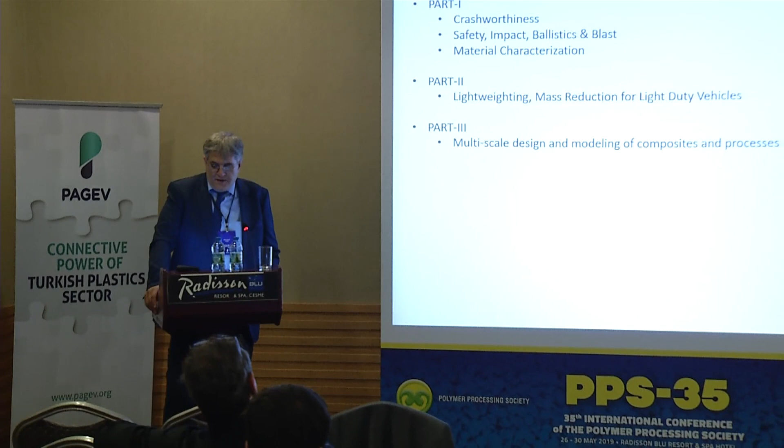My presentation is in 3 parts. It's a little bit long, around 160 slides, so I will go very fast. Don't worry, this presentation is full of movies, so we will be able to see a lot of different applications, including, as you can see here, the crashworthiness of a new car.

This test and simulation has been performed as joint research with the National Crash Analysis Center in the US, and this program is supported also by the US government, Department of Transportation, where we are actually performing New Car Assessment Program testing, which you must be familiar with if you have a car.

If you ever bought a car, you should be aware of their safety ratings out of 5 stars, right? All the cars are evaluated according to this protocol and testing, and their performance is graded against a 5-star rating. This is called the New Car Assessment Program. So as you can see, in this program we are crashing cars with a given velocity and seeing their performances, and their evaluation is also being performed, including the dummies inside.

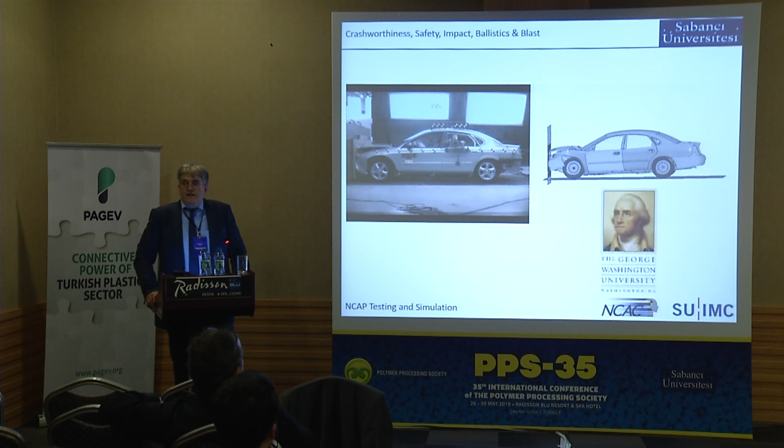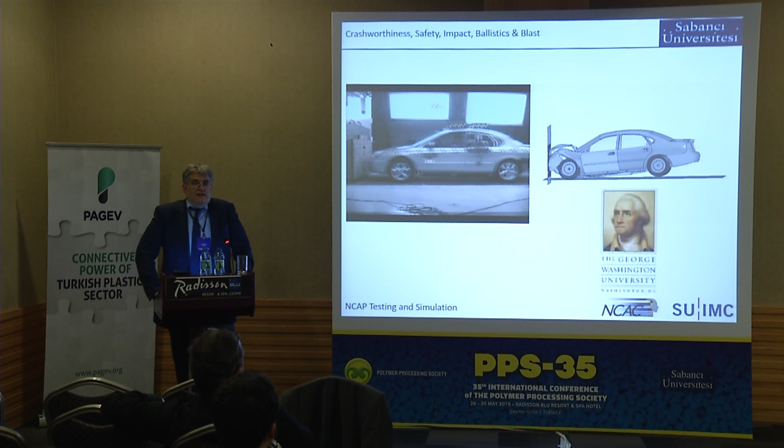This is what we call validation: you validate your numerical model on the right against a real test result on the left. So this is the ultimate goal for any computational mechanics approach, where when you have a validation, you don't need to perform these very expensive tests again and can conduct your research about safety and materials and design later on with a validated model.

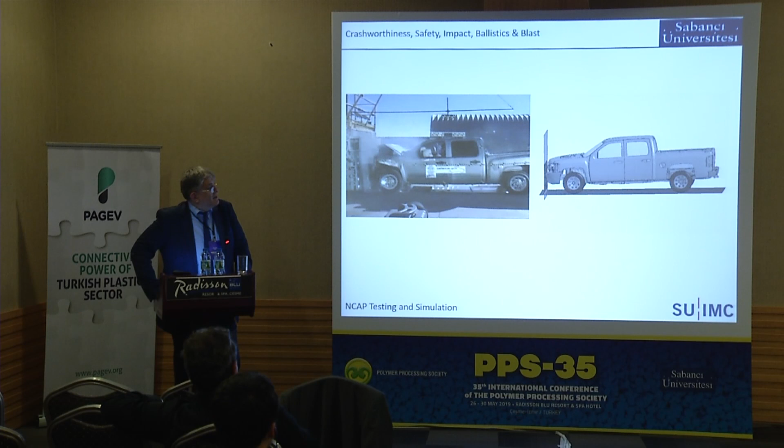Since you have validated here, this presentation will lead, in the second or third phase, to how to actually transform this structure into a composite one. Here you can see very different forms of vehicles have also been tested under this protocol, and their evaluation is graded again according to the NCAP ratings.

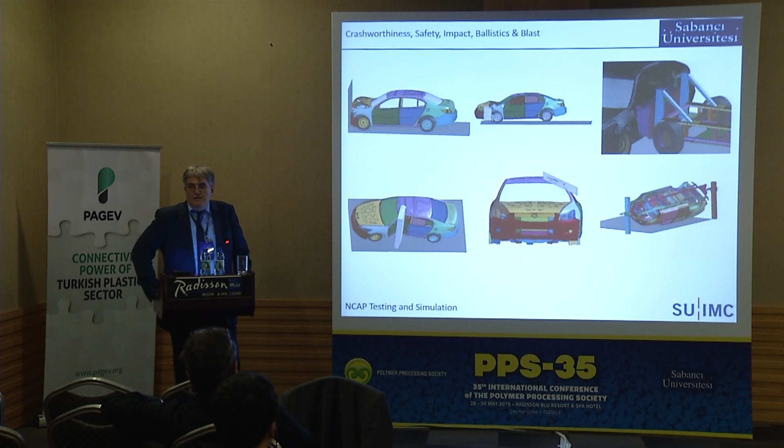You can see these are really very good validations, and these numerical models are very well validated and quite efficient in obtaining the results about safety issues. And you can also appreciate that these vehicles are built with many components, including composites and plastics. The level of validation is quite good, so we can achieve a very good correlation with the test results.

And this level of validation is only achieved by following certain methodologies where each and every component of the car is explicitly modeled. Here you can see graduate students; their job is to reverse engineer the components of the vehicle, test the materials, characterize the materials, and then build this numerical model for validation. This is not an easy task.

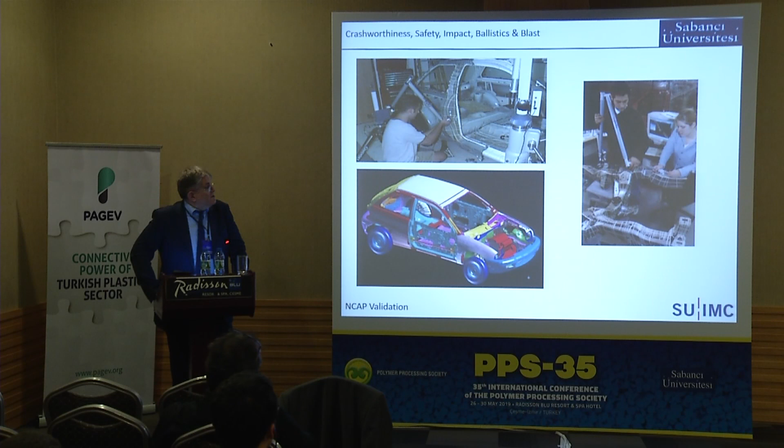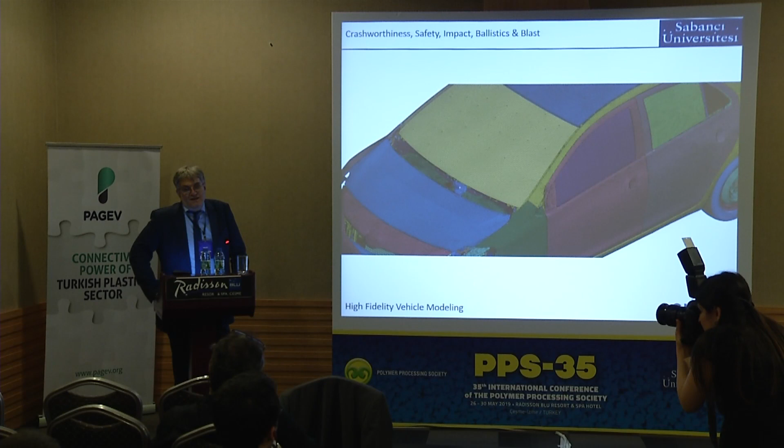This is not trivial. This vehicle model is a numerical model, obviously made up of finite elements, which Eralp Hoca mentioned. But the number of finite elements here is around 10 million, so the model is around 60 million degrees of freedom. This is a very fine model. Each and every component is individually and explicitly modeled, including foams, metals, composites, plastics, glass, anything you can think of in a vehicle.

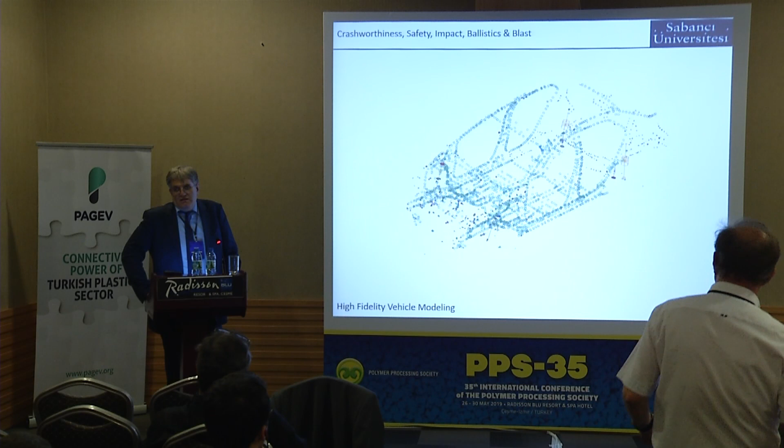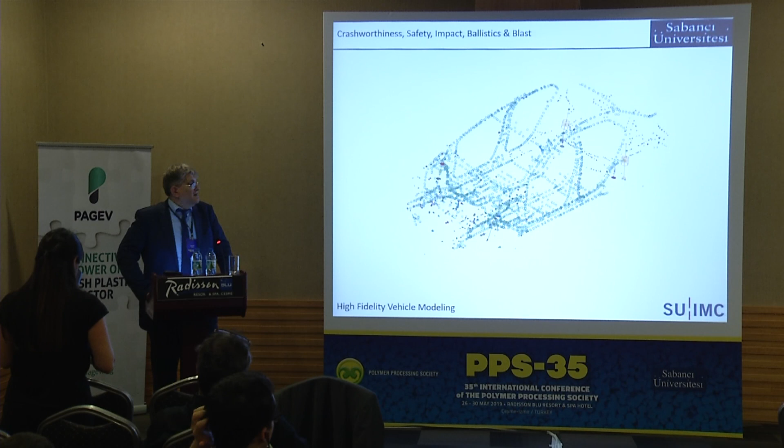Even each and every bolt, nut, and spot weld is modeled, all of them, because you cannot achieve a level of satisfaction and validation without that kind of fineness and detail. Otherwise, this is not possible. You should characterize the material, the behavior of the material, all of them, and then you can expect some level of correlation or validation.

Here in this institute, we have actually modeled a lot of vehicles and validated all of them. And these are also available in public research domains for international research purposes.

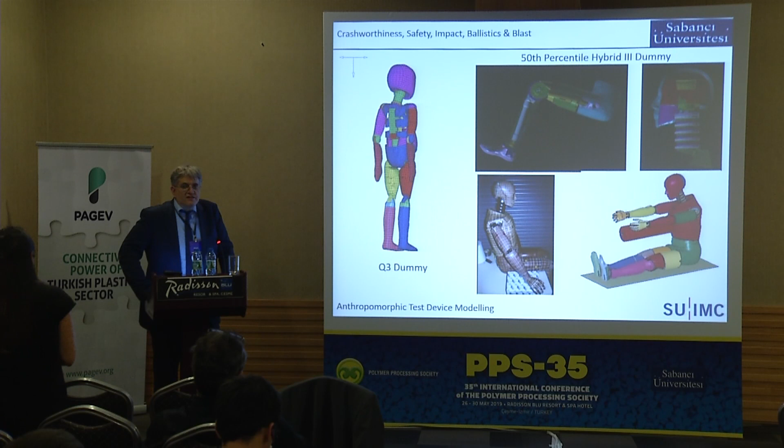Vehicles are not the only thing we have to think about when we think about crashworthiness or safety research. We have to include dummies, where we actually measure the metrics for injury. These are anthropomorphic test devices that are calibrated according to human endurance limits, and therefore we can measure how much acceleration or force is being transferred into the occupants, with which we can justify our injury levels accordingly. There is a family of those, obviously, so you have to characterize a lot of things.

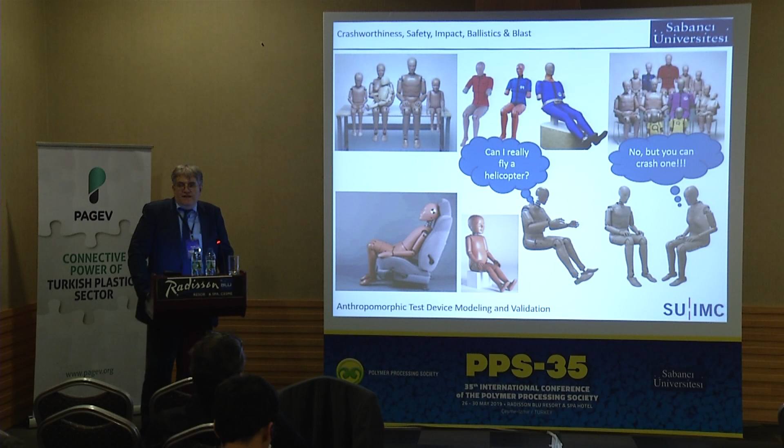Safety research is expensive. Crashworthiness is expensive research, as I mentioned. Any design should begin with crash and end with crash. Therefore, here you can see a lot of composite and plastic parts. Even elastomers are of concern. So the level of accuracy comes from the level of characterization. You have to characterize all the materials included here.

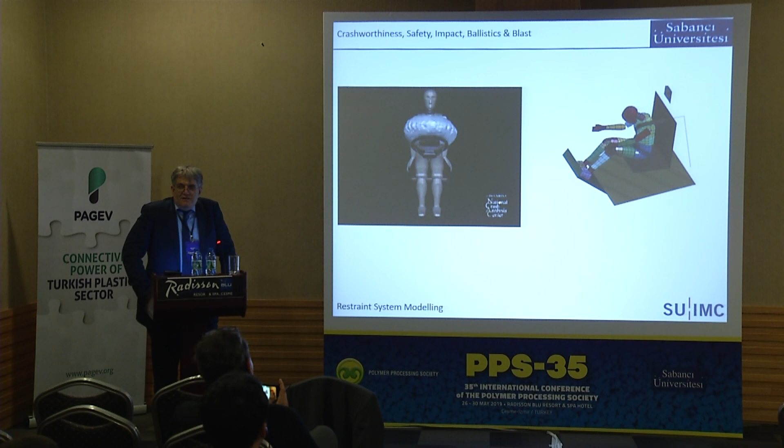In safety research, restraint systems are also of concern, and composites again come into play. Airbags are composite, seat belts are composite, retractors are composite. We have to include that material information and characterization. Foams are composite. When we have a child seat, we have the foam, which is the only thing for a child to survive.

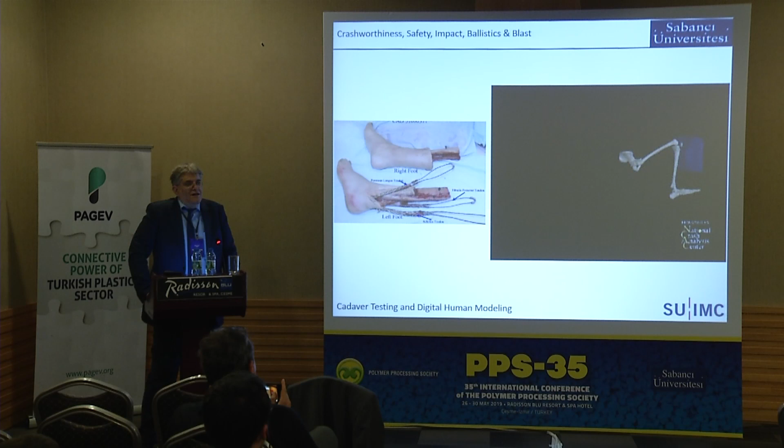Sometimes these materials are not enough, because a dummy is made up of aluminum and rubber, but our material is human tissue; the human is a composite. Then we have to characterize human tissue. We have to perform cadaver tests. We have to model a human. Therefore, the active research in this area is now aging, for example. What happens to human tissue and endurance limits for injury when we age? We have to test. And this is something very difficult.

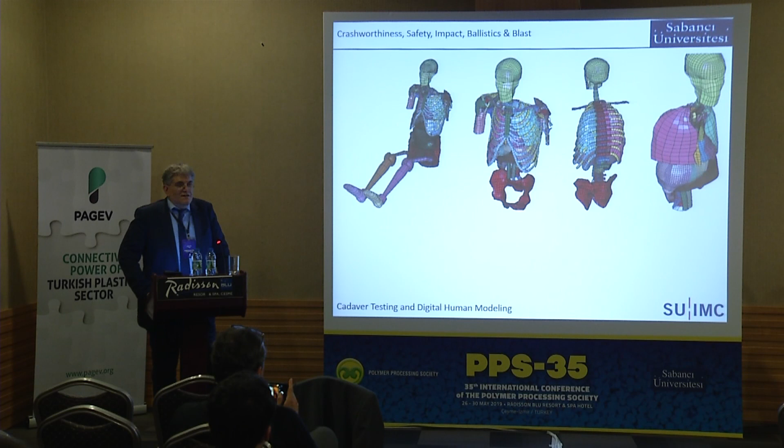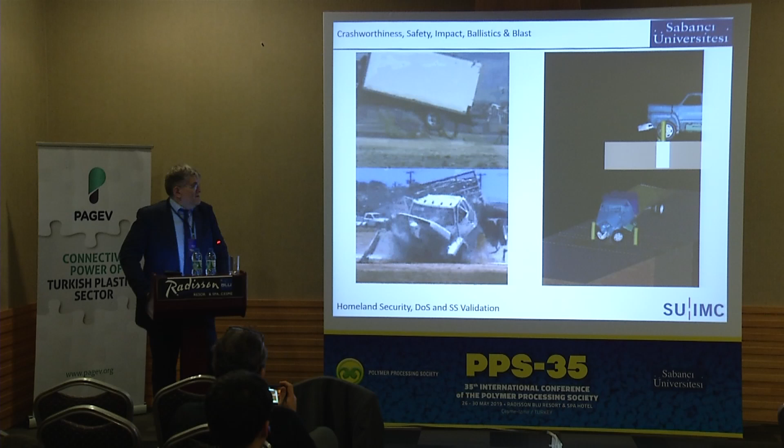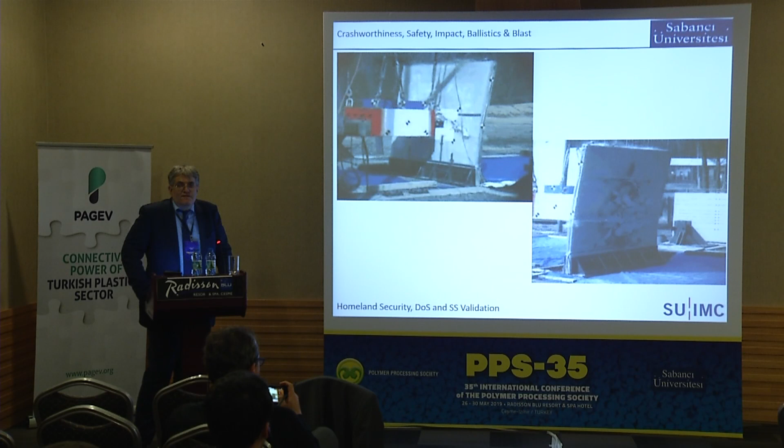This research, when we think about safety, crashworthiness, and the composite world, also involves the characterization and testing of concrete or geomaterials. This is probably the oldest composite as we know it. Concrete, or research related to those kinds of materials, is also in our area of research. Here you can see protection barriers for protecting critical or strategic buildings behind, and the level of accuracy again depends on how much calibration or characterization you have performed on this material, and in this case this is reinforced concrete.

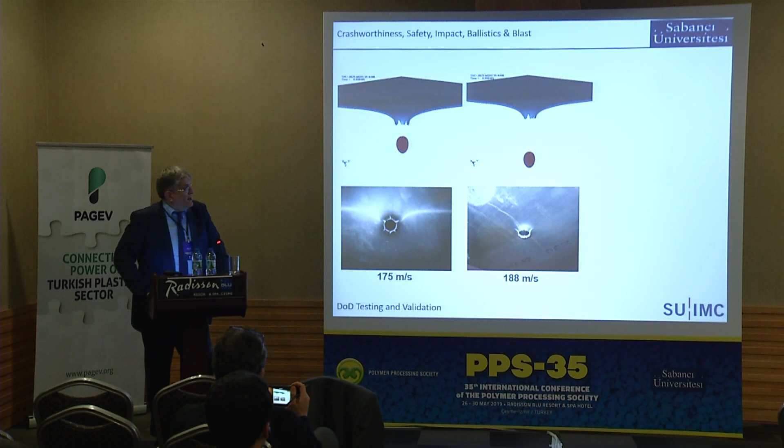Composite research is also very important when we think about high deformation rates. Here you can see a study on ballistics, and we can see that the speed of deformation based on the impact of the projectile is quite high. And we can see that there are different forms of failure, and that is not constant, not certain; it's changing, it's evolving, it's transforming. Therefore, you have to characterize the behavior of the composite material based on the fact that high deformation rates, really high strain rates,

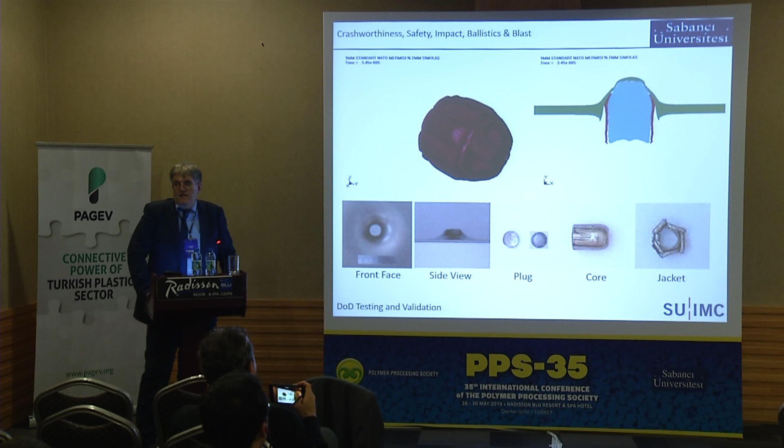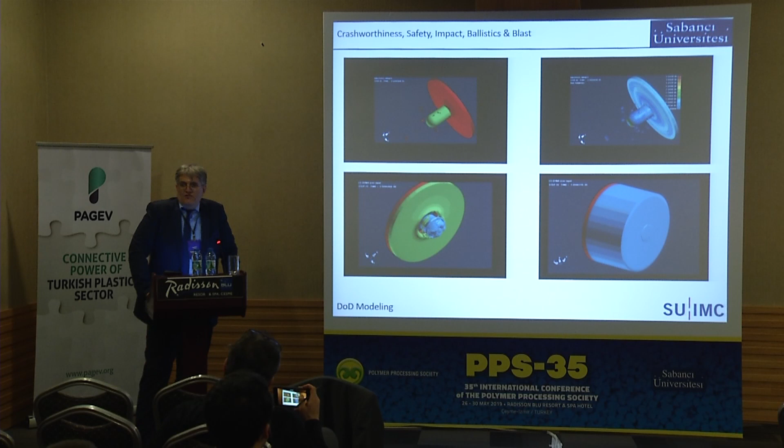are quite challenging. Here you can see a composite armor, where an alumina-based metal matrix composite is used in front of the armor, and there is also a reinforced plastic behind it with an elastomer binding. Therefore, this is a very interesting composite research area that we have to consider when we think about design and application in the composites world with an interest in crashworthiness or impact.

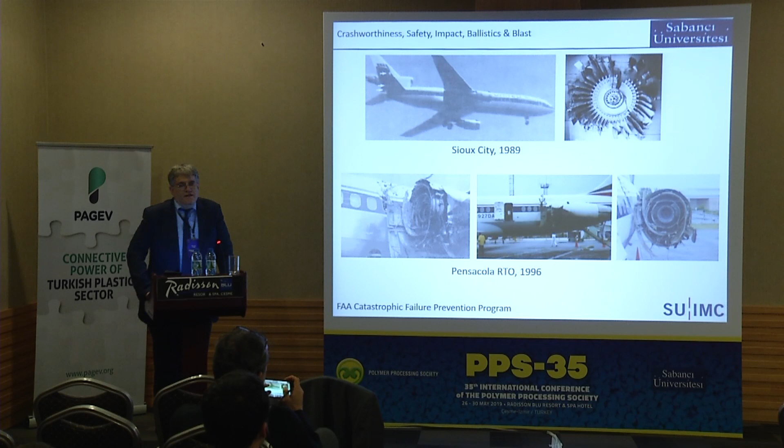Another area is civil aviation. In civil aviation, some catastrophic failures have been seen in history, and countermeasures have been taken according to these events. The civil aviation authorities have now dictated that each and every new engine should pass this very test, in which the blades of the engine are released with an explosive at full RPM loading at very high speeds.

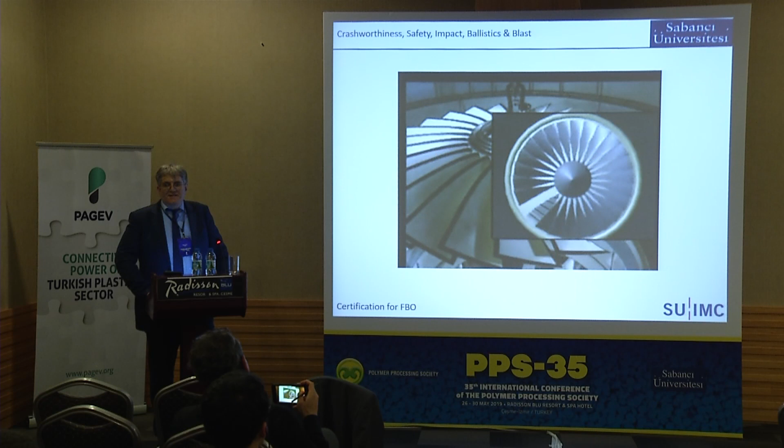And then you have to contain this blade inside the engine so that it is no threat to the rest of the airframe. You can see this test is quite expensive. At least you are ruining one jet engine. And you can see the test chamber, right? So it's a multi-million-dollar test.

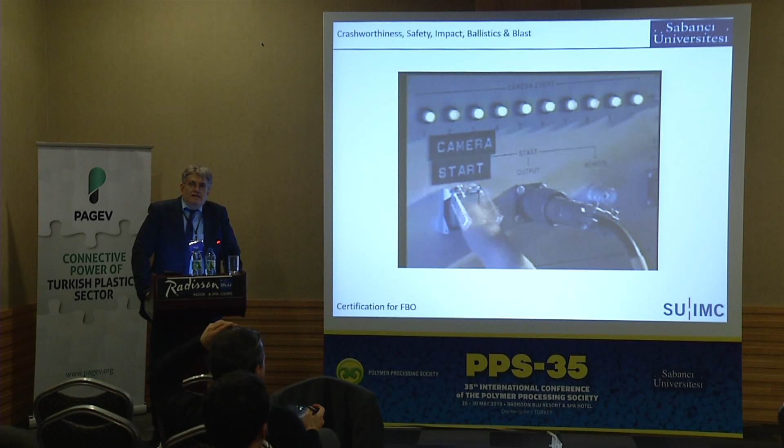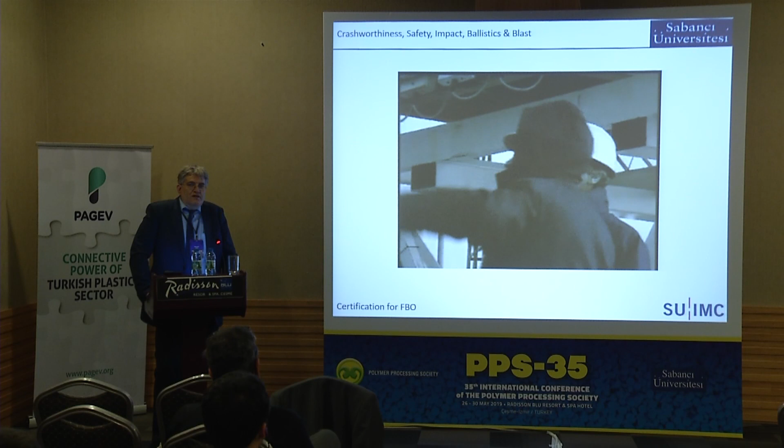Therefore, we have actually developed these numerical methods and numerical techniques so that authorities can accept, to a level, that the numerical results can be accepted as testing, and this is called certification by analysis, because testing each and every engine is a very difficult and expensive area of research.

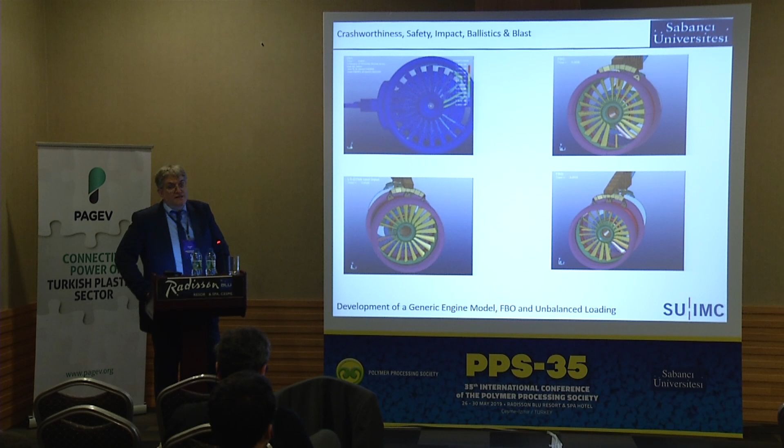So we developed, as you can see, an engine model and have validated this according to the test results. You can easily understand that an engine has several different parts which are composites. Obviously there are other elements or materials, but it's a combination. It's a very sophisticated structure, but since you are characterizing each and every material according to this methodology and protocols, you are achieving a good validation, as we have seen.

Birds are a threat. For those of you who are coming from Istanbul, you should have seen yesterday, it was chaotic. I was very afraid.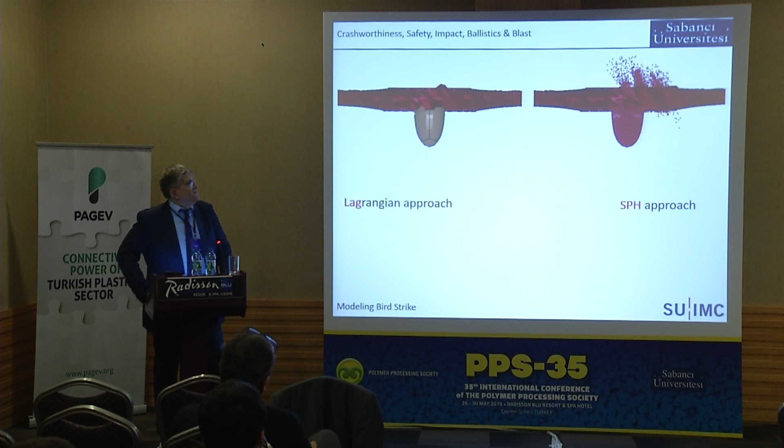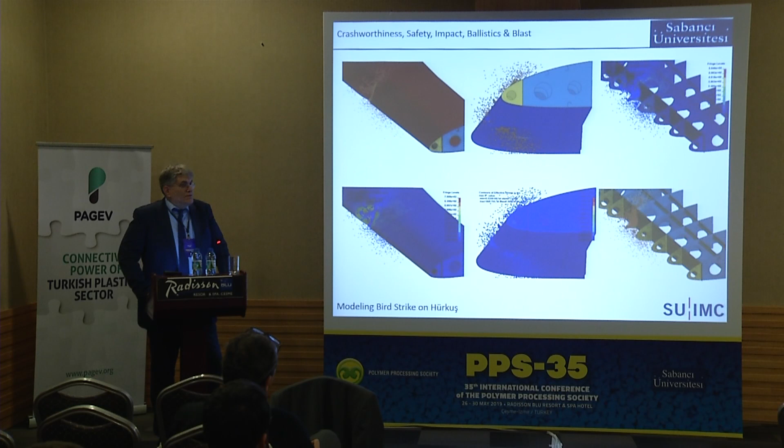A bird is a composite structure, right? So how to come up with an equivalent bird structure so that we can assess its threat and design our structures according to this threat, and vice versa. So threat estimation and modeling is also somehow related to the composite design. Here you can see a bird impact being tested and numerically validated for the Hürkuş. This is our very first airplane which has civil aviation certification. And you can see that the wing structure is good enough to resist the loads coming from a bird threat.

We talked about the high deformation rates for composites and plastics. This is a very well-known phenomenon that materials behave differently under different deformation rates or strain rates. Not only metals or polycrystals, this is also the case for composites and plastics. And here you can see this area is somewhat the area of interest for us. And for testing materials at those speeds, you cannot use conventional servo-hydraulic or servo-pneumatic equipment. You have to build equipment like this, which we call a split Hopkinson bar apparatus. And these are for testing materials at high speeds.

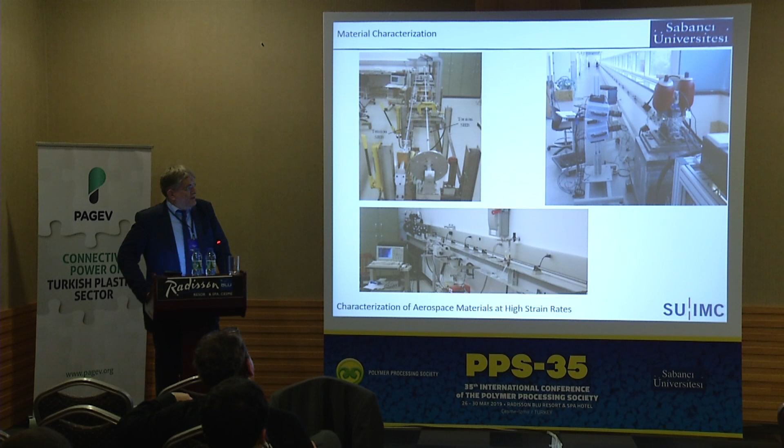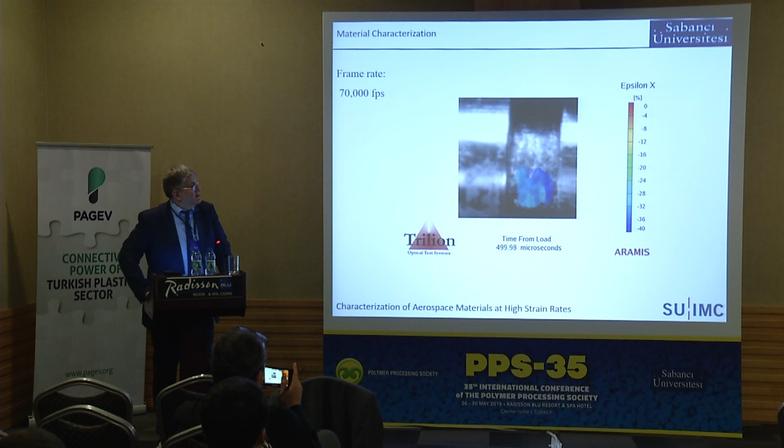So when Eralp Hoca mentioned that SU IMC has these capabilities, we are also in the phase of constructing these facilities in Sabancı University so that we can test materials at very high speeds. As you can see here, this is a 70,000 frames per second movie for a material in compression, and you can really see the shock wave propagating through the material, and the material totally behaves differently. And this is the Hopkinson bar apparatus.

Characterization that we have mentioned all the way from the beginning of this presentation is the key to the validation, and is the most important thing in composite and plastic research. I really have to mention that I'm coming from a computational mechanics background, but this mechanical testing laboratory, I'm the coordinator of this laboratory, and we are working with Eralp Hoca also under this research. So we know the importance of testing and experimental mechanics. You can't validate any numerical model otherwise.

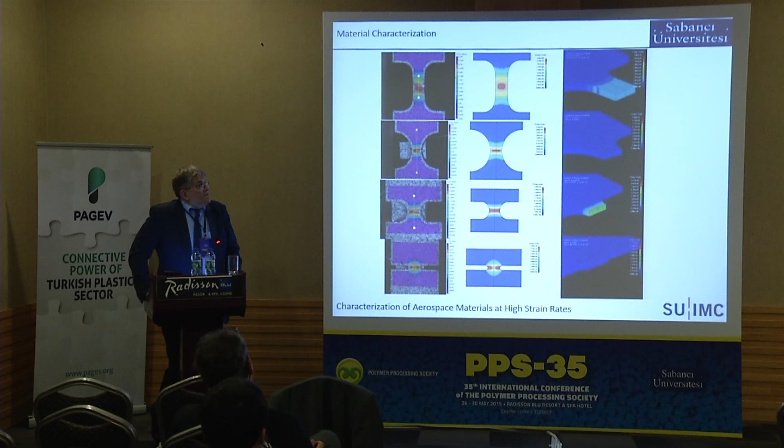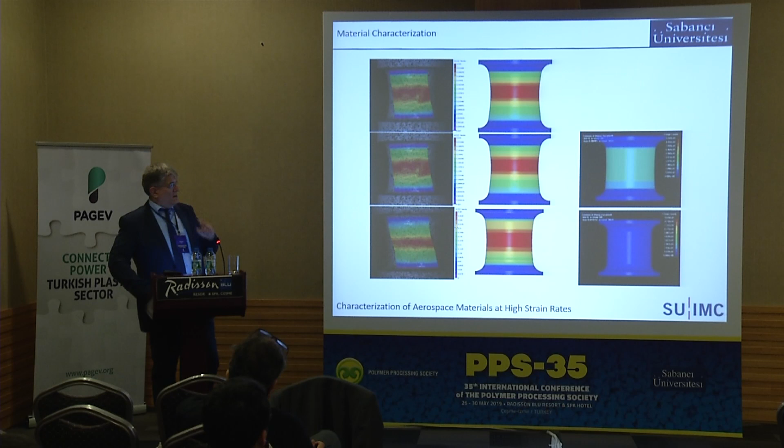So we have a well-justified methodology and standards that we are following, and we have an accredited laboratory over there where we can test any material according to the required standards. And you can see the level of accuracy and validation for specimen testing here. Okay, again, when we come and talk about aviation, we now know that composites are very widely used in this area, and therefore we have to develop methodologies.

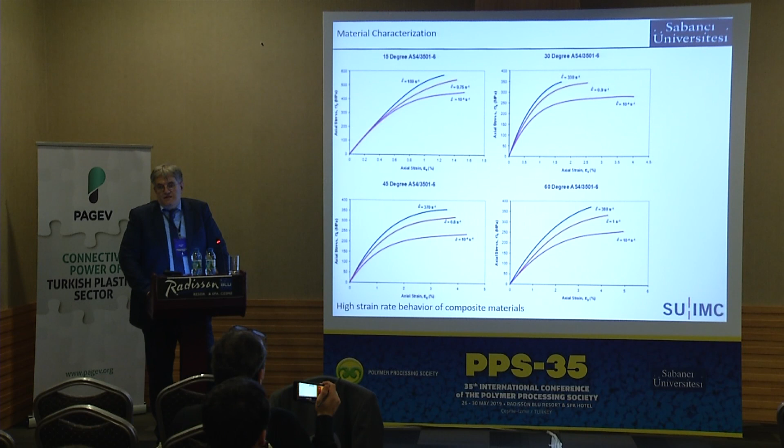And you can see here the strain rate dependency of composite materials: independent of whether they are glass reinforced or carbon reinforced, they are strain rate dependent. Here the strain rates increase, I think that works, right? Okay, strain rates are increasing in this direction from the purple to the blue line, and you can see that is somehow changing the behavior of the material.

And the other interesting thing is composites are also state of stress dependent. Eralp Hoca actually mentioned the formulations of those materials in tensor form, and we talked about the invariant space in terms of the composites, and you can really see that composites are state of stress dependent, and there is no well-developed methodology in the literature yet to characterize and model the behavior of composites under different states of stress.

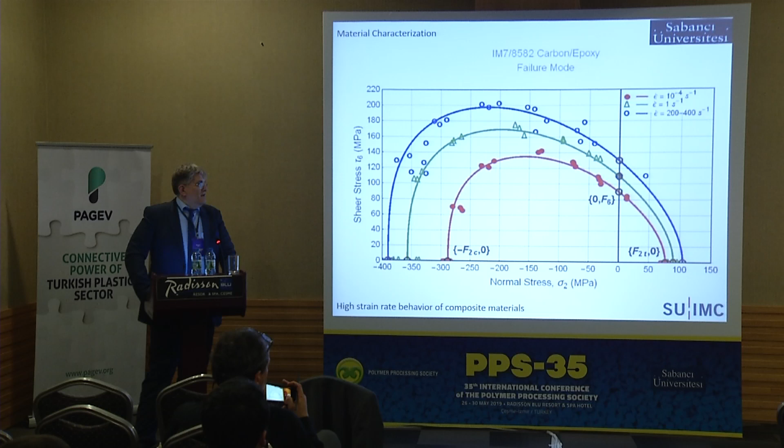Okay, here also another material. One was glass reinforced, and the other was carbon reinforced. Both are strain rate dependent materials. Therefore, we have to measure those effects. Right now, there is no laboratory in Turkey to do that.

Okay, we talked about the uncontained engine failure, or we have seen the test. What if we cannot contain this blade inside the engine? Then it's a threat for the fuselage, and you have to protect the fuselage. And we have used here, you can see, fabric composites. We have used aramid or Zylon or other combinations of different fabric composites. And you can see the validation between the test results and the numerical studies.

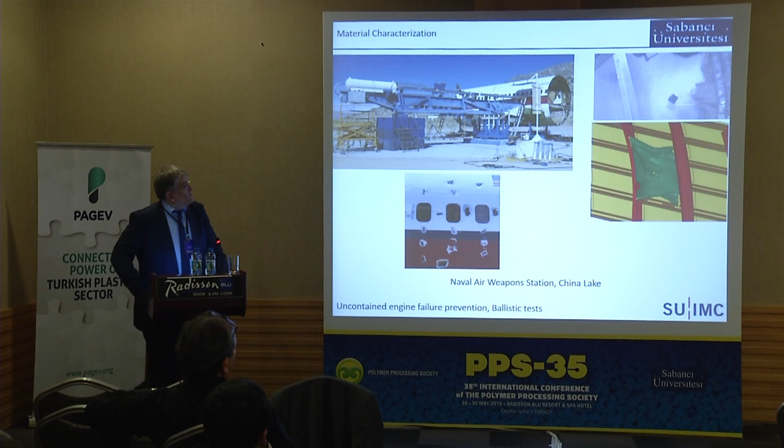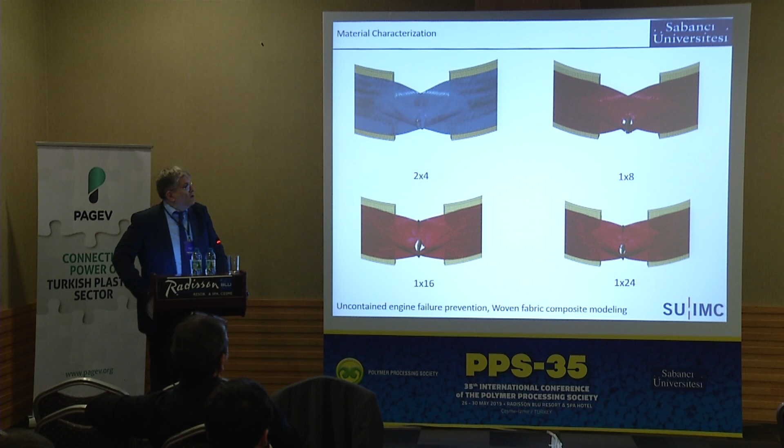And another approach to contain this blade threat is wrapping the engine structure with several layers of Zylon or aramid fiber. You can see that this blade is arrested inside the engine successfully, but simulation was the tool here to determine how many layers were necessary. So it is so good in predicting the impact and crashworthiness of this airframe or structure. You can see here different numbers of layers have been tested in simulation form or platform for their performance.

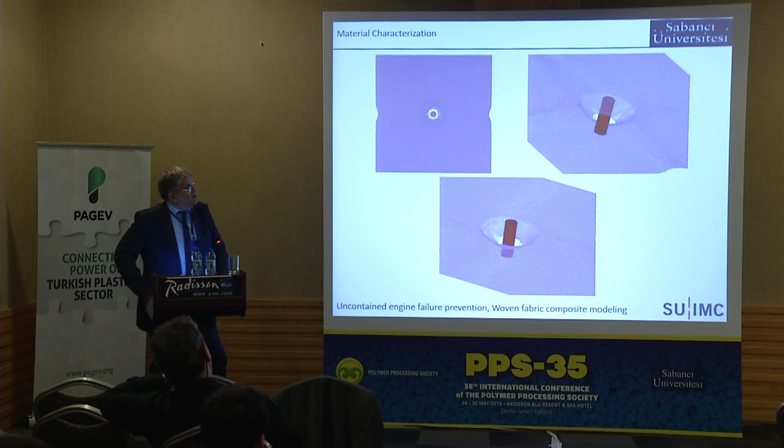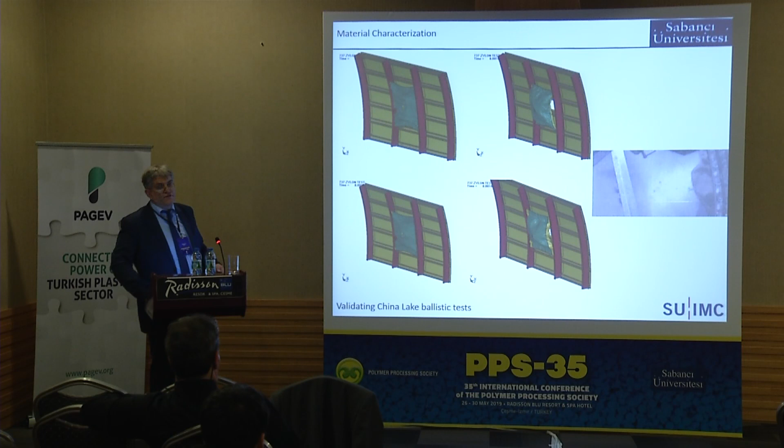We mentioned multi-scale approaches for modeling composites. This is also a good example to do that, all the way from individual fibers and yarns. We call it the micro level, and then a combination of those we call meso, and the combination of different fills and yarns, the whole structure, we call the macro scale. So our studies were also good enough to simulate those structures in terms of multi-scale modeling in length. You can see the anisotropy, high level of anisotropy, is successfully predicted here. And this research is finalized with fuselage testing, protected with different forms or combinations of woven fabric composites.

The second part of my presentation I actually added last night when I was waiting for my delayed flight in the airport, because when I came back from the US and talked with people from the industry, I noticed that there is a need for deciding which parts can be transformed into composites or plastics from metal forms. They don't know, and they don't have any developed strategy or methodology to decide. Even OEMs or tier 1, tier 2 companies have no idea how to decide which components should be in composite or plastic, so that we can construct a lightweight vehicle because of the concerns of emissions and reduction of emissions, which is a regulation and motivation behind this. So I wanted to include that part in my presentation.

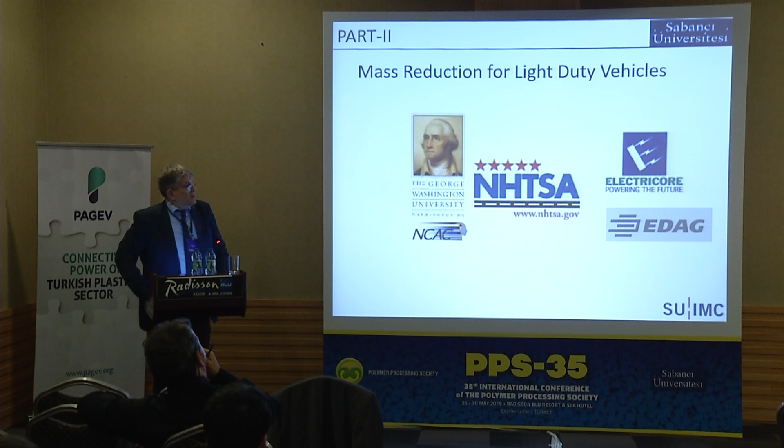This research also has been performed with the National Crash Analysis Center, National Highway Traffic Safety Administration, which is a US government agency for the Department of Transportation, and industry also backs it up. This research is also now continuing with 2 national labs, Oak Ridge and Los Alamos. So in this presentation, I have to mention that we have worked on a Honda Accord vehicle, and our aim is 10% of the current retail price, and we wanted to see how many parts and which parts should be manufactured as composite or plastic.

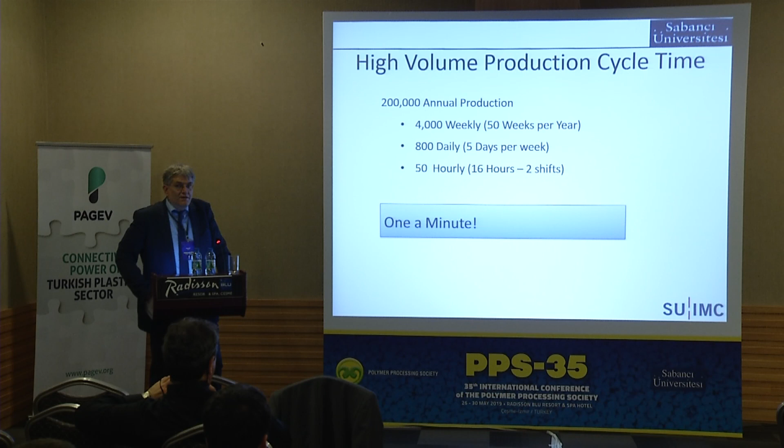Obviously, this vehicle is a mass production vehicle. It's almost 200,000 annually produced, which is millions in 5 years. So it makes a difference in the industry. One vehicle is manufactured every minute. Therefore, a decision on a transformation from metal to composite is quite important here. So when you are making a transformation from an existing metal part to a lighter composite version, you have to pre-assume that it's going to have some costs, but how much? This is the decision-making criteria for us. How much cost premium can you actually pay for it? And that also should have a reflection on the amount of emissions that you are saving.

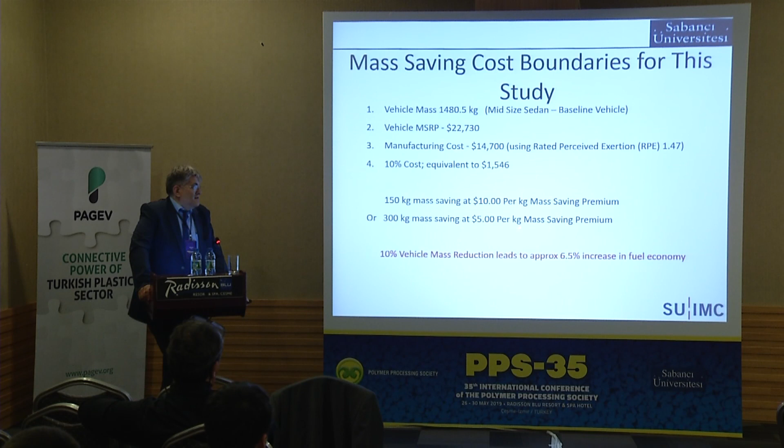Therefore, we have found that 10% of the costs leads to an amount like this, and then either you save 150 kilograms and that will lead to a $10 per kilogram mass savings premium, or if you can save 300, then it's like $5. So that's what we will see at the end. But we have to first develop the methodology behind it. Here we have to start again from the coupon level. This is a building block approach, as we call it in aviation; it's very well known. You have to start from the coupon level all the way to the platform or vehicle, and you have to validate your results at each and every step.

Because you cannot compromise, especially on safety or crashworthiness, when you make a transformation from a metal to a plastic or composite version. You have to still make sure that the performance of the vehicle is not affected, changed, or compromised, at least in terms of safety. And how to do that? As you can recall, in the beginning of the presentation we showed validated vehicle models, right? So the methodology depends on characterizing the material that you want to change. If it is composite, you test it, you validate it at the component and subsystem level, and you test it also at the vehicle level. But how? By using simulations or the computational mechanics approach, because you have these validated models already in place, right?

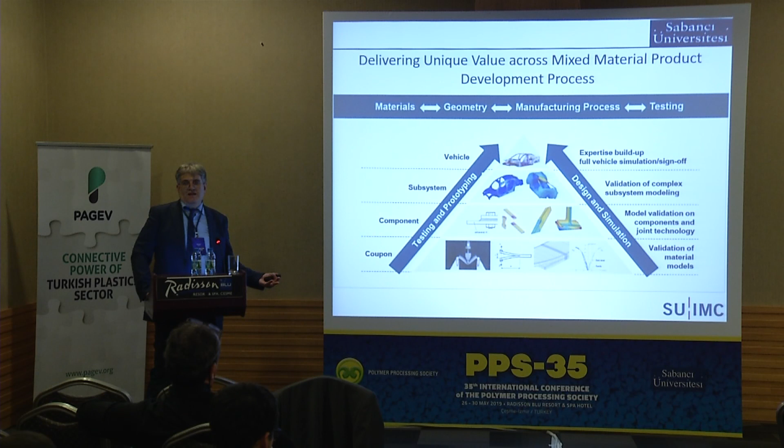Here you can see every composite part starts from the design, and we also take into consideration the material information. We characterize it. The process parameters are involved, because when you're talking about plastics or composites, this is the key. Process matters. You have to also involve the information coming from the process, and at the end you perform the vehicle level testing in simulation platforms.

Here you can see the material costs for the materials of concern, and you can see that the material cost with manufacturing, process, scrap and manufacturing difficulties are all involved in this methodology. So you are not only comparing kilograms. This is, I think, the most difficult thing I have seen in the industry when I came back. They're comparing only kilogram to kilogram, and then the cost.

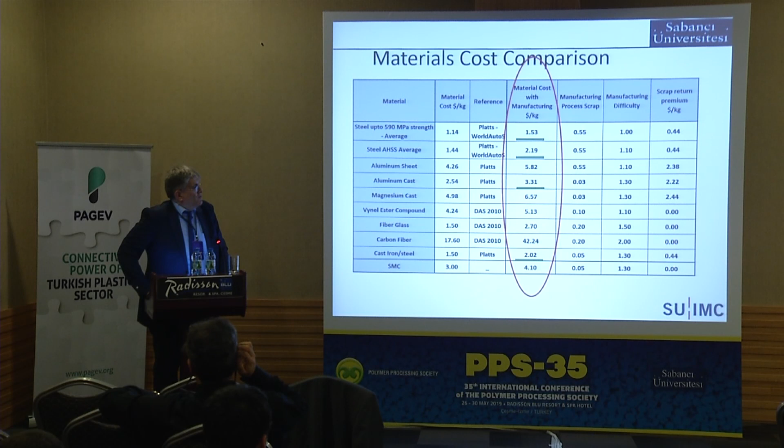So it's not only the material cost or weight that should be of concern during a transformation like this. And you have to consider the cost of the material in time, because it's a function of time, especially in today's world. You can easily understand, I think, what I say. The material prices have increased almost twice within a month. So what is the gradient of the cost of the material? You have to plan accordingly when you are deciding.

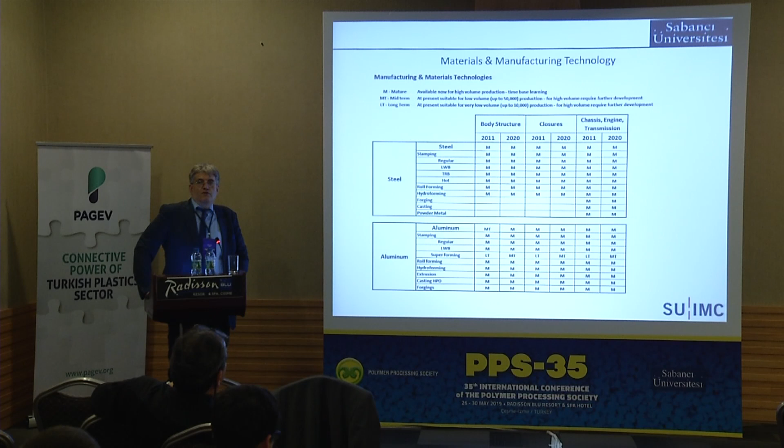Clearly, for each and every material you also have to consider the maturity of the manufacturing technology. If it is steel, almost all the methodologies are mature enough to perform your production or operation, but when it comes to plastics or composites, there is still some room. Sometimes it's in the long-term run, so there is still a gap, a delta for you to consider these materials for some of the parts for transformation, which means that still in today's world you cannot consider a 100% composite vehicle, because these technologies are still not mature enough to do that.

Then it's maybe a good goal or a futuristic expectation. Maybe it's going to be coming, but we should be ready. But we should also be realistic that some of the parts will not change at all. But which one? We have to then invent this methodology and use it for decision making.

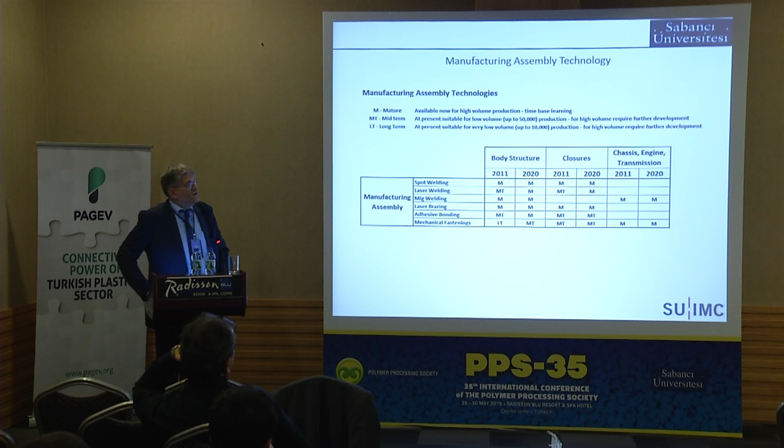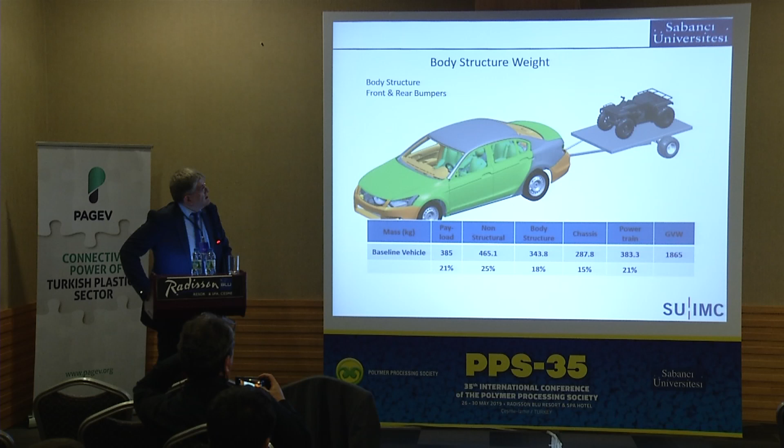Okay, so this is now comparing the mass of the baseline vehicle, and for each and every subsection, here you can see non-structural weights. Here you can see the chassis, and now the powertrain and body structure. And here is the methodology. The methodology is actually quite simple, but still should be good enough for decision making.

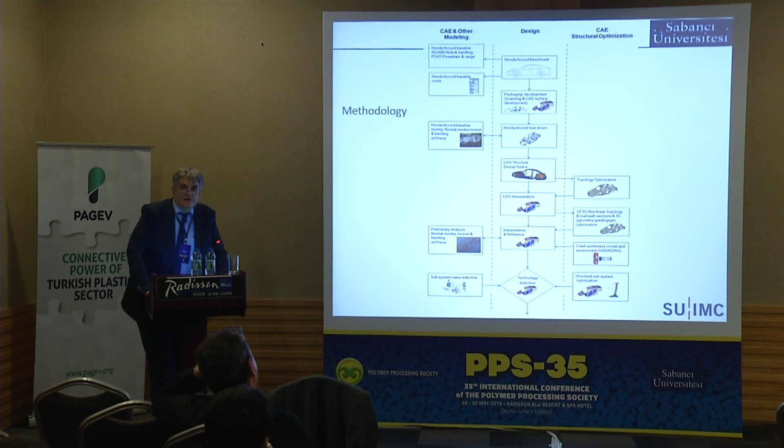It's basically: test all the materials, get information for manufacturability, design for manufacturability, design for disassembly or recycling, for scrapping, design for connection parts that are going to be changed if any transformation is possible, and perform each and every analysis after a topology optimization, with which you create the load distribution or flow of the load within the main frame of the vehicle, and design accordingly. Then you have the options to decide on the materials based on your cost premiums. At the end, that's going to be our ultimate goal.

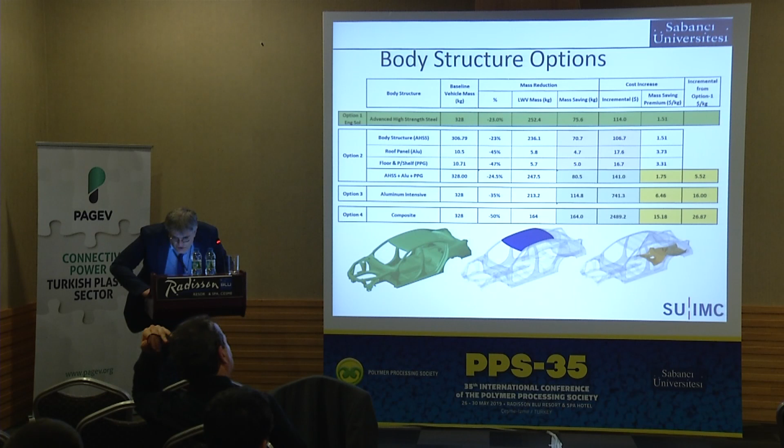You can see that the cost increases are calculated according to those changes. So you can make a full composite vehicle, but the question is, are you ready for this cost premium or the increase of the cost? Or is the market ready or not? It's not a question of whether you can do it, it's a question of whether the market is ready to pay this cost premium.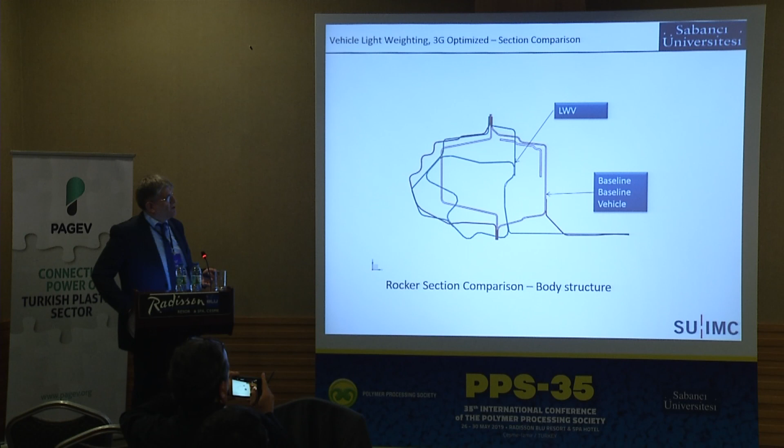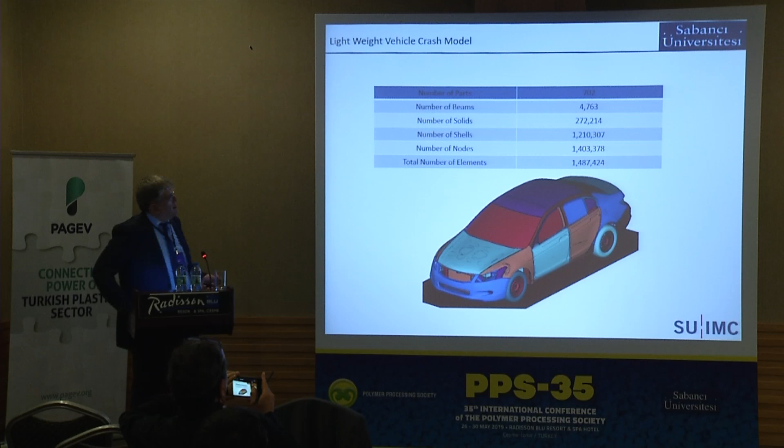And these are the tests that you have to make sure there is no compromise. Remember the fact that any change is subjected to the constraint that there is no compromise from safety. And these are the safety tests or new car assessment program tests, basically crash tests that you have to pass. Here you can see the vehicle and the stiffness of the vehicle after the cost reduction, the weight reduction. So the stiffness also is not affected or compromised.

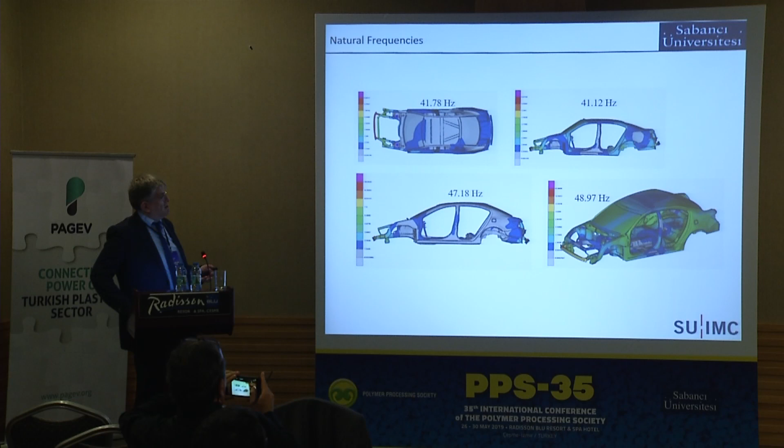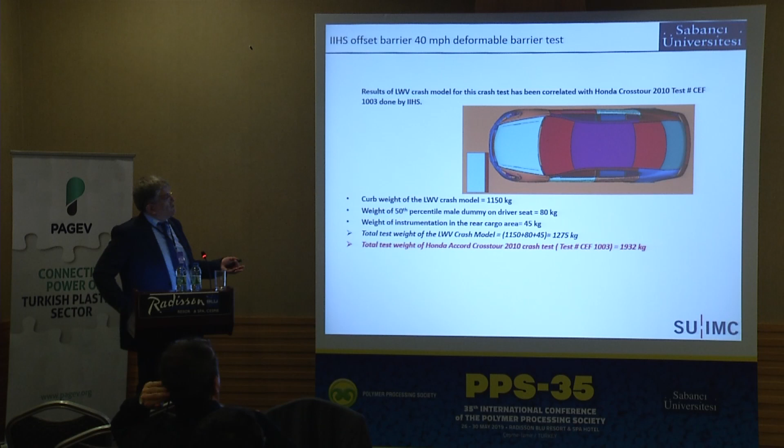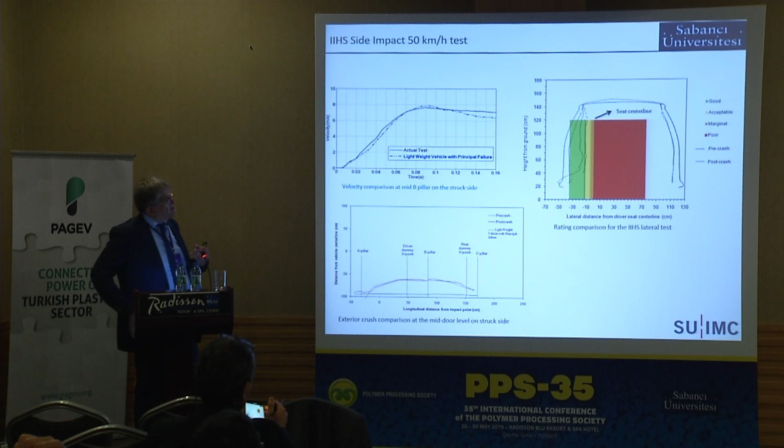And for a full frontal or offset frontal test, the same applies. You can see the signals are again showing that the vehicle is not compromised in terms of safety, and you can see each and every crash testing scenario is being again simulated according to the standard, and we see that the lightweight version of the vehicle is still good enough in terms of safety.

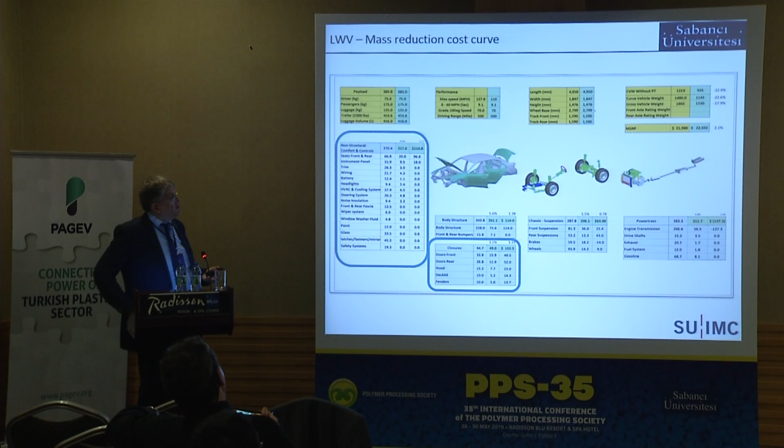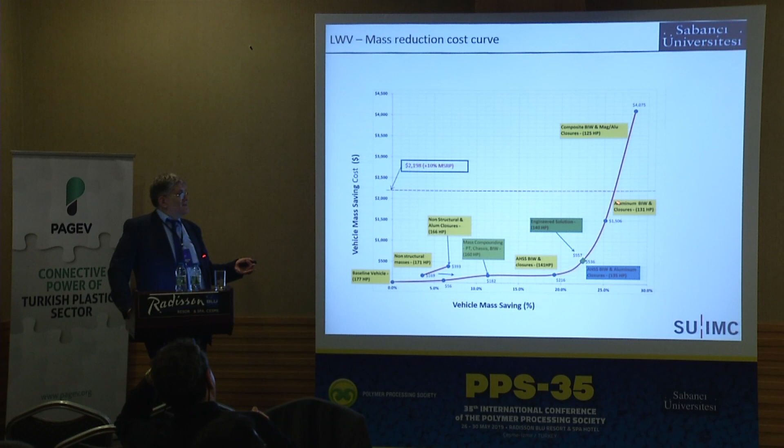Which parts will be able to transform? Not all of them, but here this is the baseline, somewhere in between, and that's logical, right? But which parts? Then you have the information of what is the cost of each transformation over here. Then you can find out which parts will be transformed very easily. This is a very good decision-making tool for any composite transformation research.

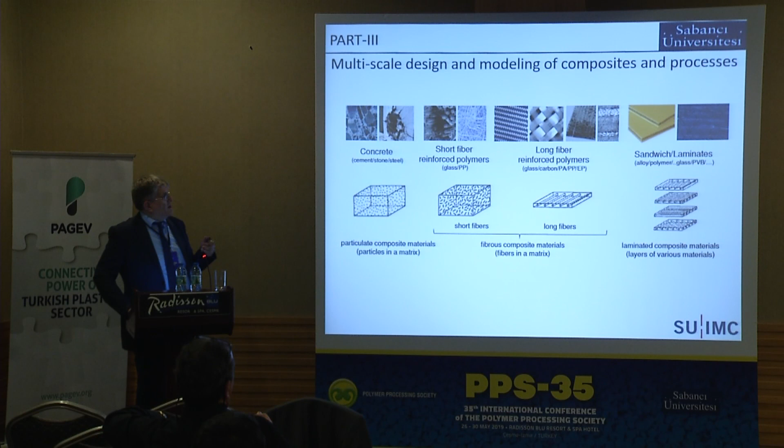Okay, I don't know if I have time. I have a third part that is related to multi-scale design and modeling of composites and processes. There are a few examples that we have performed here, including again, we can model concrete-like structures. You have seen short fibers, long fibers, or sandwich panels or laminates.

With this methodology, we also can very easily model the length scales you have seen in the woven fabric composite version of the uncontained engine failure research, that we can model each and every fibril and fibers and warps and fills, and you can see here the detailed model of the weave structure very easily. You can see the length scale starts from here at the level of micrometers and all the way to the centimeters for the macro scale. And in between over here we call it in the literature the mesoscale.

Therefore, in all scales, we can actually perform our analyses and model the structures accordingly, depending on our expectations and requirements. So, if a macro-mechanical model is enough, there is just no need to go deeper and model your structure at the micro-mechanical level, because it is costly. It naturally requires much more attention and computational power. Here you can see also some examples for the multi-scale modeling.

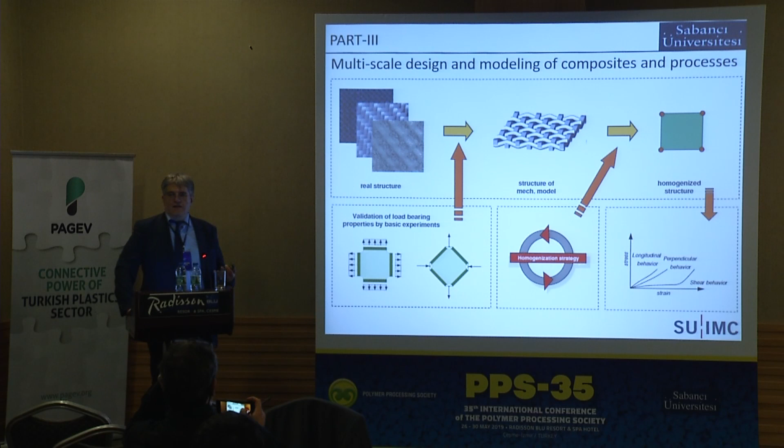Here the key is actually the homogenization that we are talking about. Every scale change requires some level of homogenization, because there should be a bridging from micro level to meso and meso to macro, and you have to then come up with a homogenization methodology, which is an active research topic. Here we have braiding, for example.

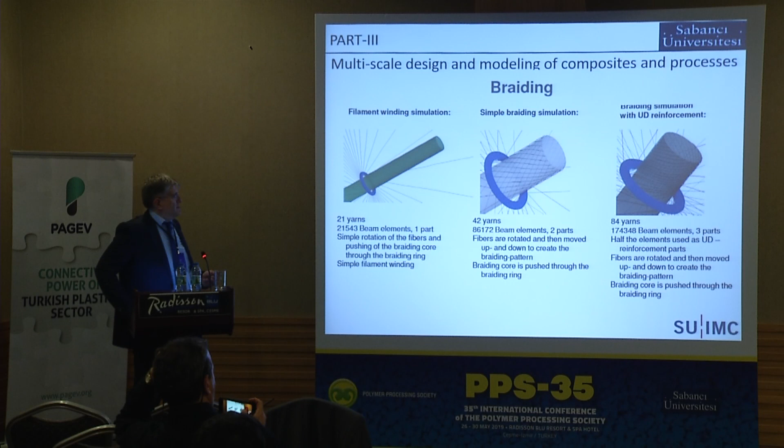Here there is also another example for multi-scale modeling in terms of draping analysis or computations for draping. You can see here the level of anisotropy is quite high, and the methodology has successfully performed here. And you can see these are the material axes, or primary directions for the stress tensor and orientation. You can see in different orientations our computations have successfully performed with the strong anisotropy.

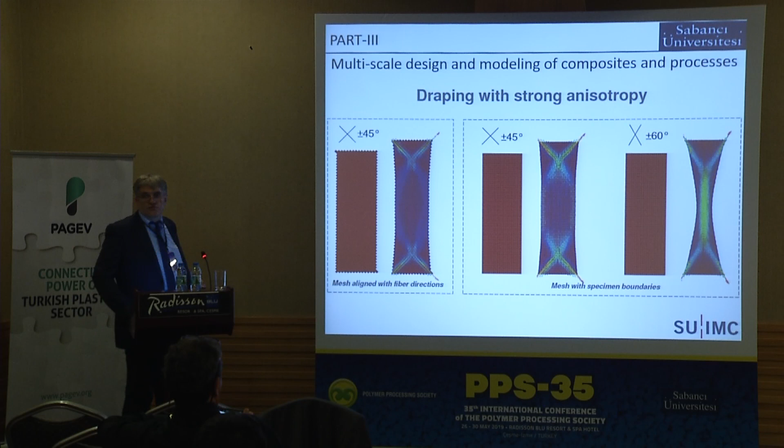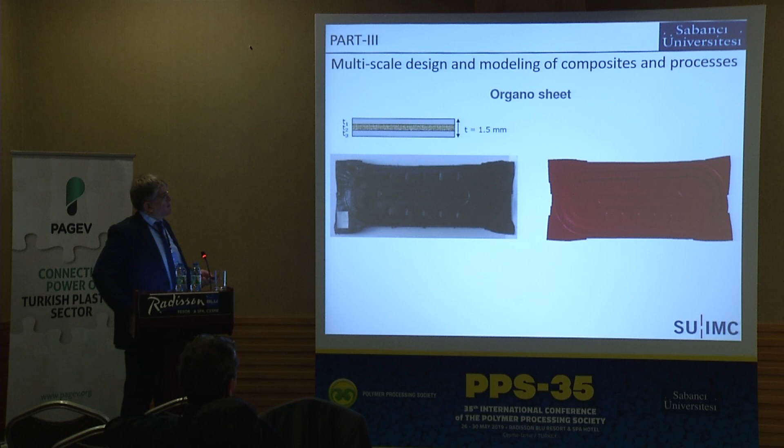There is also another example for organosheet. Organosheet is also thermoplastic, supported by a fiber. You can see it's hot formed and consolidated in this form. And you can see the grid lines have been validated quite well with the simulation results in this case for an organosheet example. It's also possible to model processes like RTM or infusion.

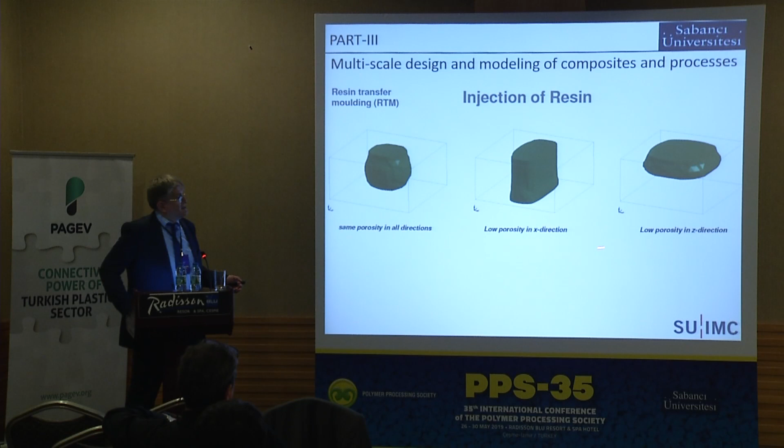It's basically quite easy. Here you can see injection of the resin under the condition of same porosity in all directions. You can see it's uniformly distributing, and if there is low porosity in X direction, it's arrested in that direction and cannot move that easily. And the same applies for the Z direction over here for the injection of the resin.